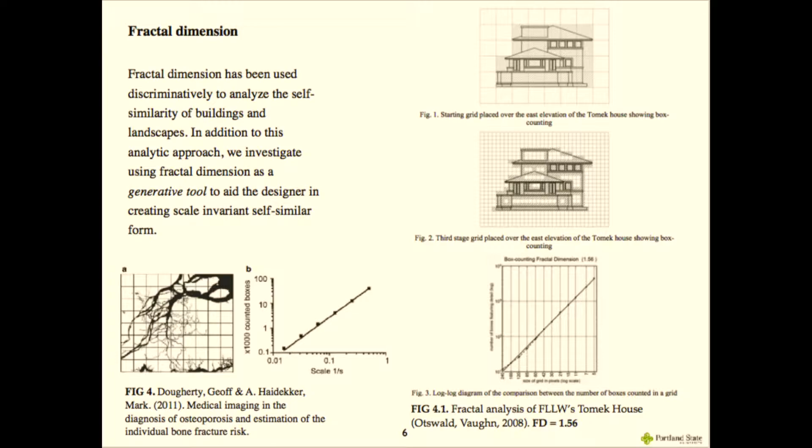Throughout history, we can see architects using fractals in their geometries. And there's also a strong connection to nature.

There's a lot of algorithmic design being investigated and explored in architecture, and some of this stuff is really, really fascinating to me. There's kind of like the emergent paradigm, which is that the whole is greater than the sum of the parts—superadditivity.

Then there's the fractal or holographic idea that the part contains the whole, which is more like this idea of DNA. Within the part is the seed for growth that is basically like an algorithm.

Algorithmic architecture is nothing new. We see that there's been a lot of exploration.

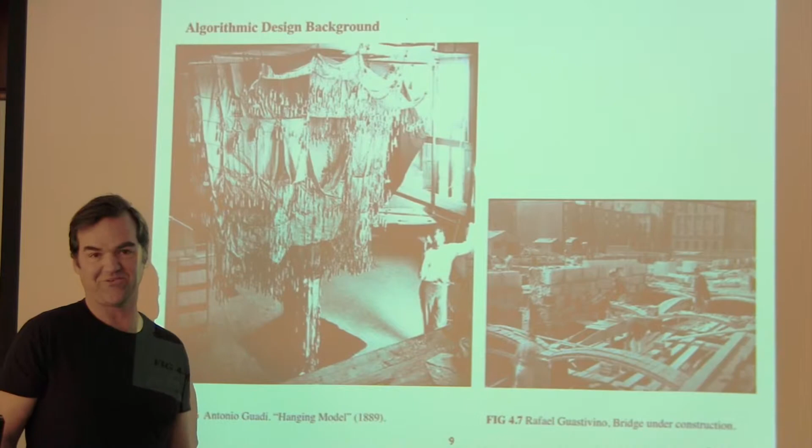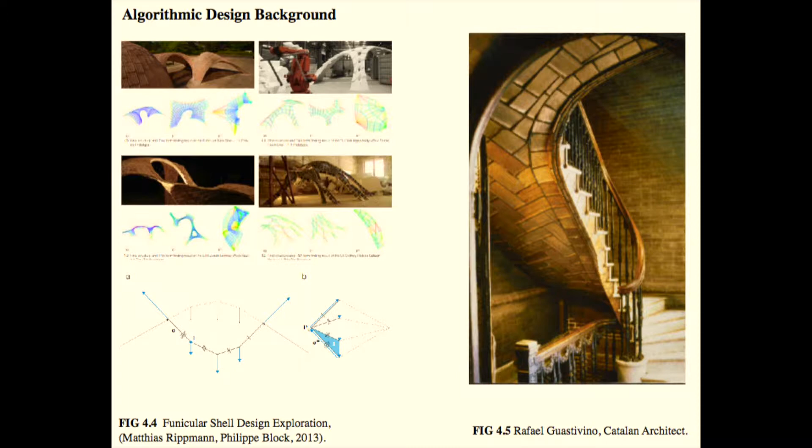Here's Antonio Gaudi's upside-down chain building, where he's studying forms that are in tension with catenary curves. He flips this upside down and it becomes a completely compressive form that he can use masonry elements to build.

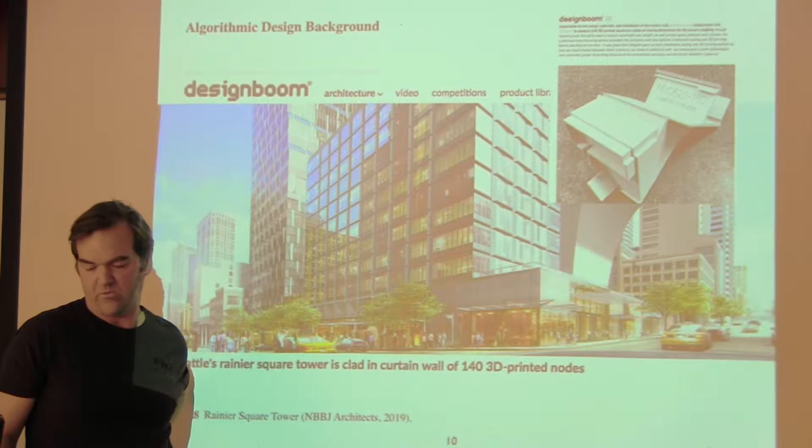And this was just a building going up in Seattle soon, where they're 3D printing elements of the facade.

Are people here familiar with Game of Life and CAs? How about Golly? Has anyone played with Golly? Golly is a tool you can download as open source, where you can basically program with CAs.

Wolfram has shown us that Rule 110 for an elementary CA is capable of universal computing. So anything you can do on a computer, you can do with an elementary CA like this.

So the question I guess I'm asking you hypothetically is: is nature using a CA in its algorithm for how it defines growth patterns?

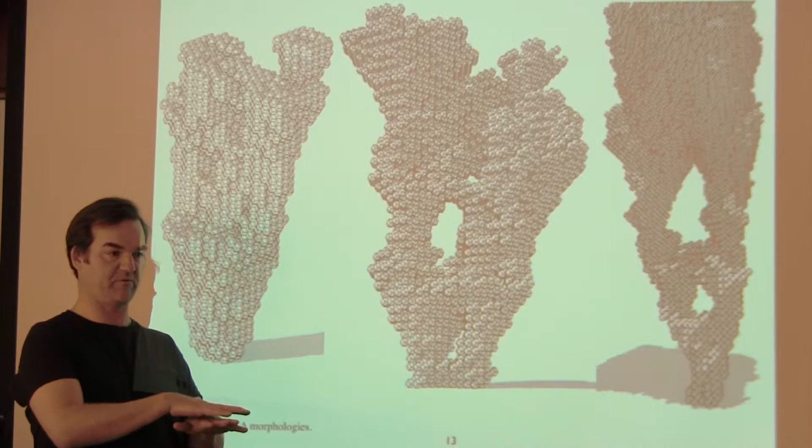I explored that earlier with Game of Life kind of strategies, where each successive iteration was laid on top of the iteration before it, so it creates this three-dimensional object. It's a two-dimensional plane of cells, but it's kind of additive, so you create these objects.

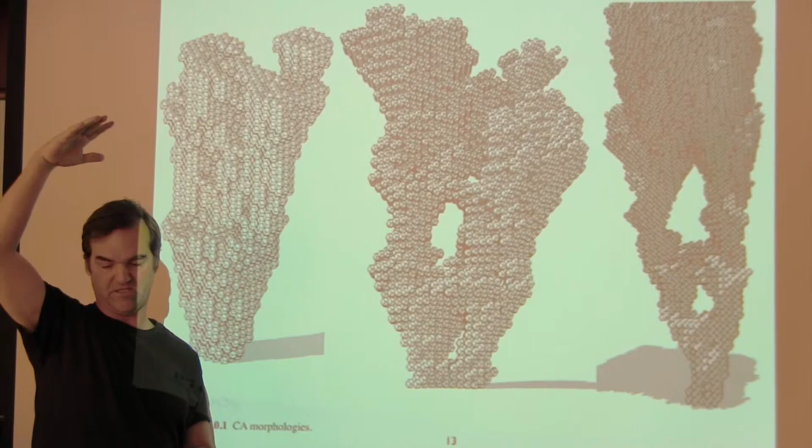And they have obvious fractal qualities. You can see this kind of bifurcating branching structure starts to happen. And they're all based on these very simple rules.

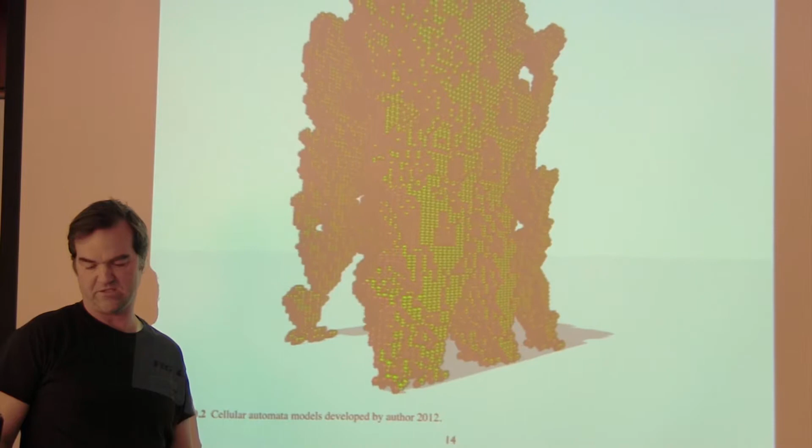Some of them are all interesting, but some of them are mind-boggling—they have these... this one in particular has a strong axis, and they don't cross over.

So it's like kind of geometry for free. You have a simple rule set, and you can create these really complex objects without having to actually define them like with a blueprint. Instead of having this complex representation system, you can just represent this object with a simple line of code, and then create a rich kind of tapestry of form.

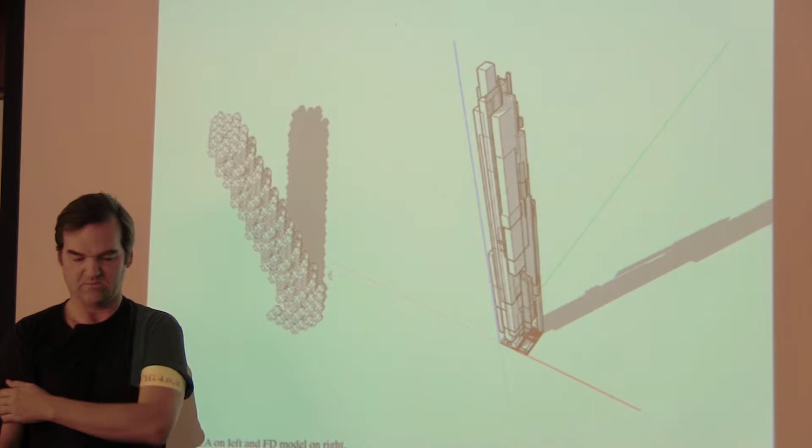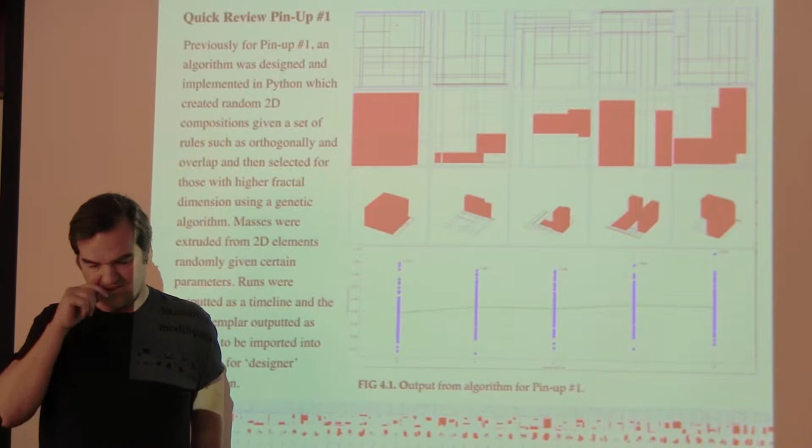Now I'm moving from that into this model that I'll present today, which is using this fractal dimension and a method I'm calling the Wollendorf method, after my late professor.

This is like a composition 101 problem or exercise, where you have a sheet of paper and you're asked to put down a number of lines that are orthogonal. This is used to teach basic principles of composition, like focal point and secondary focal point, rectilinear motion, terminus, symmetry, asymmetry.

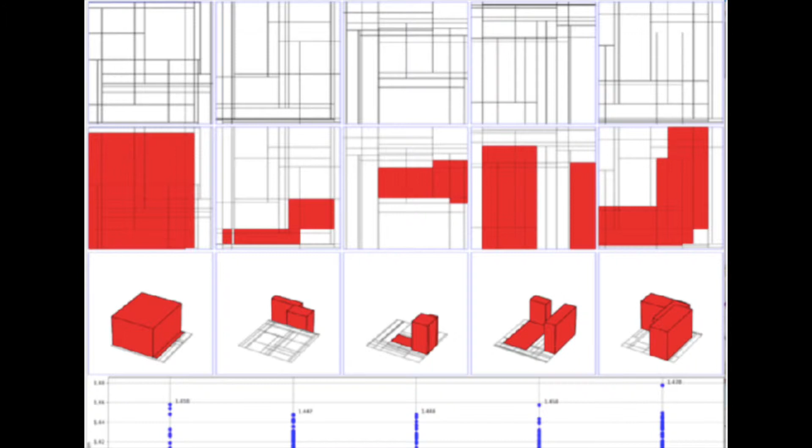All the gamut of compositional elements are embedded in this little exercise, and then you choose some of these to be masses, and the masses are extruded into the third dimension.

So when I interpreted this in code, I basically used random configurations to start with, but then we're selecting for higher fractal dimension, or a target fractal dimension, which creates the multi-level complexity and potentially more interesting compositions.

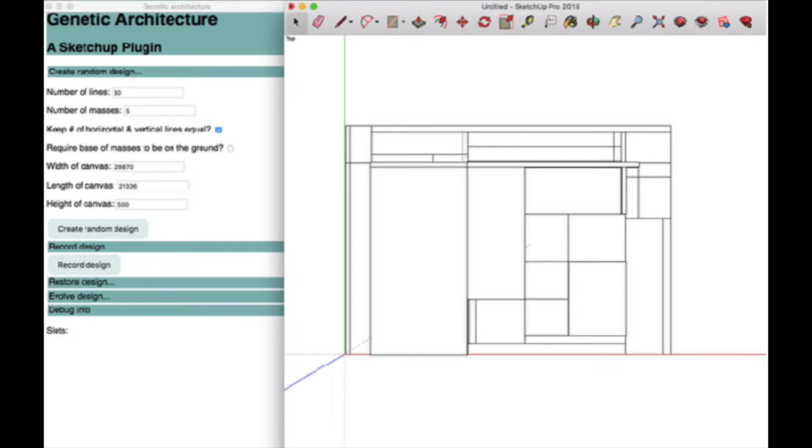So then I have a team of architects that I'm sending these designs to, and they're reacting to it. I've taken this tool now and designed it as a plugin for SketchUp, which anyone can use.

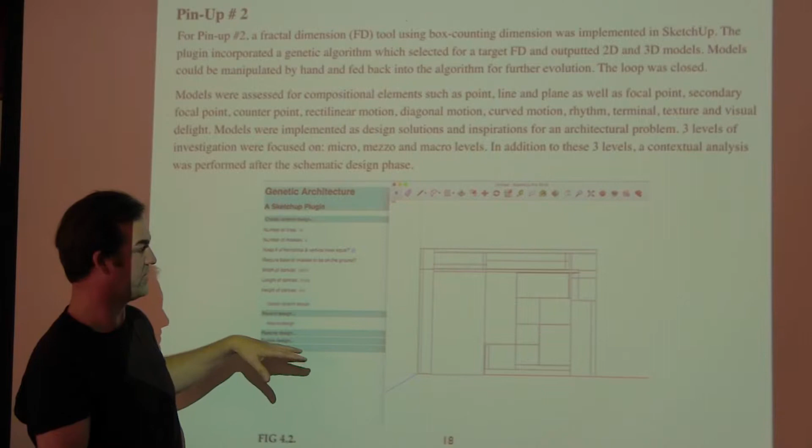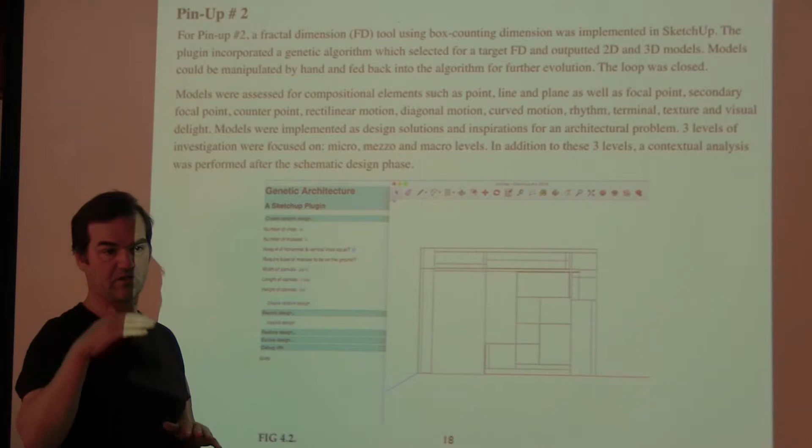You can create an object with certain parametric inputs relative to a building problem, and then those parameters can be defined. As the architect, you can under the hood reprogram the tool to have additional parameters that could be useful for that particular design problem.

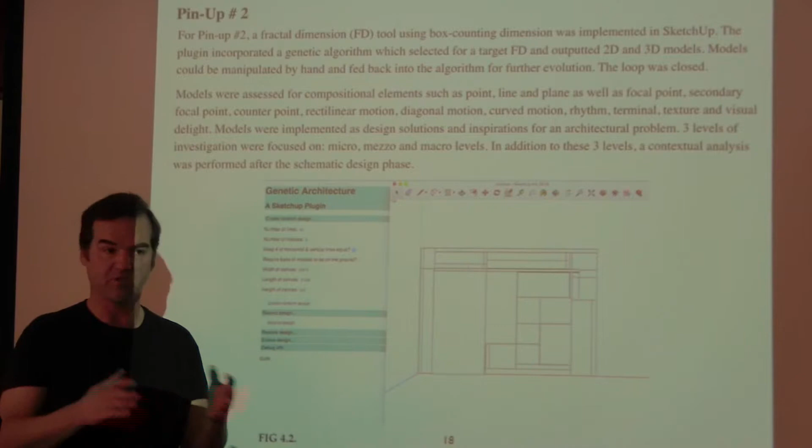So instead of just using CAD or BIM out of the box, here now we're able to redefine the CAD system so it can compensate for the unique qualities of that particular design problem we want to solve.

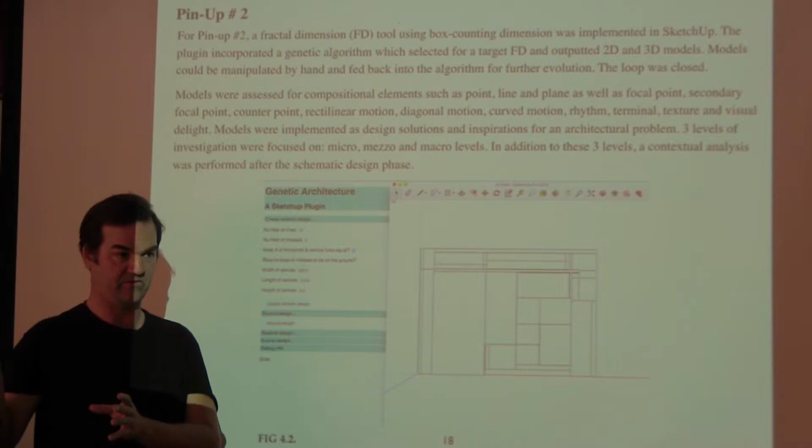The project I have is one that I competed for professionally with a team of architects, and we didn't win.

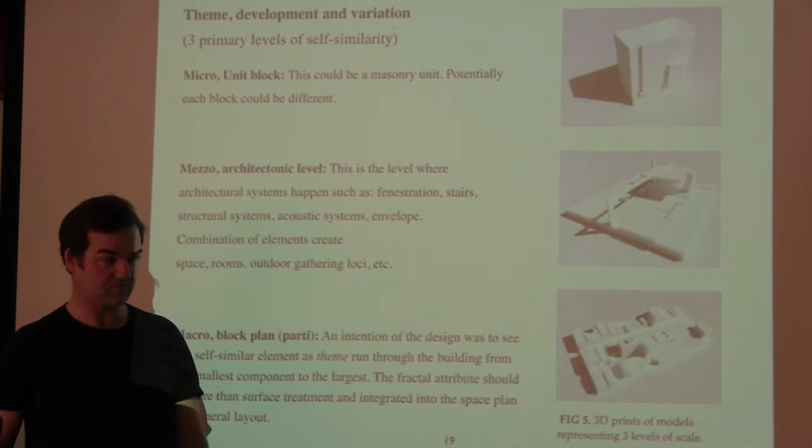I learned a lot about this project, so I'm using it as my case study. It's a mixed-use project in downtown Ithaca for affordable housing, ground-level retail, and a new bus station, which is desperately needed. There are some models on the table you can pass around that are 3D prints of this.

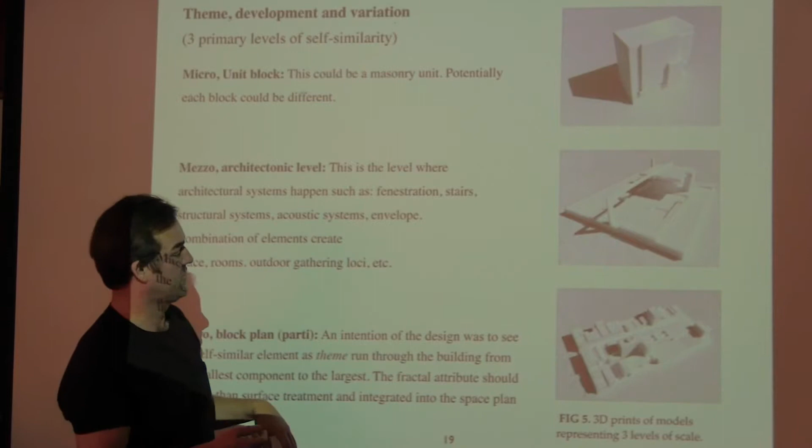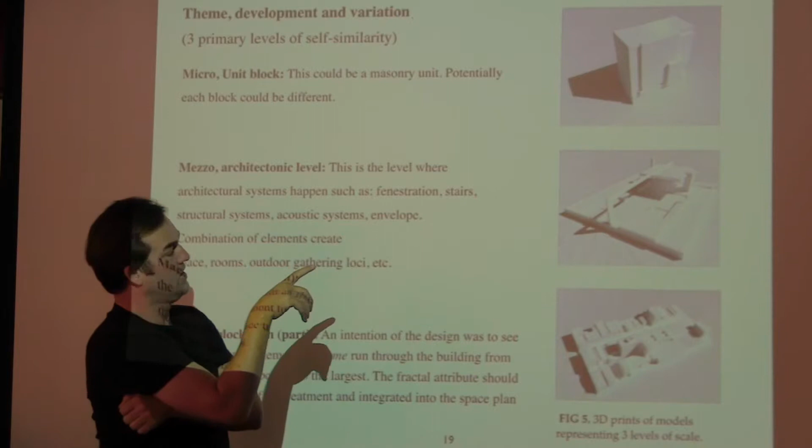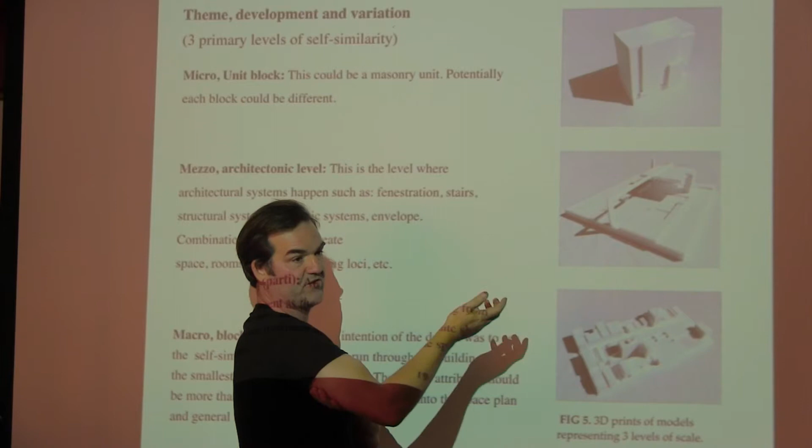I'm looking at the design from three levels of scale. The top is the level of the masonry unit, the block. Then this is the architectonic, human scale, where you could actually occupy or use it—it has function, like a staircase or fenestration elements. This is an outdoor pavilion for music or outdoor events.

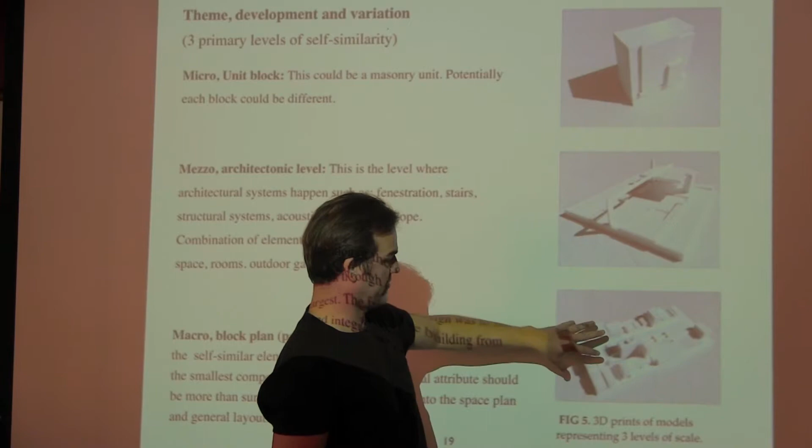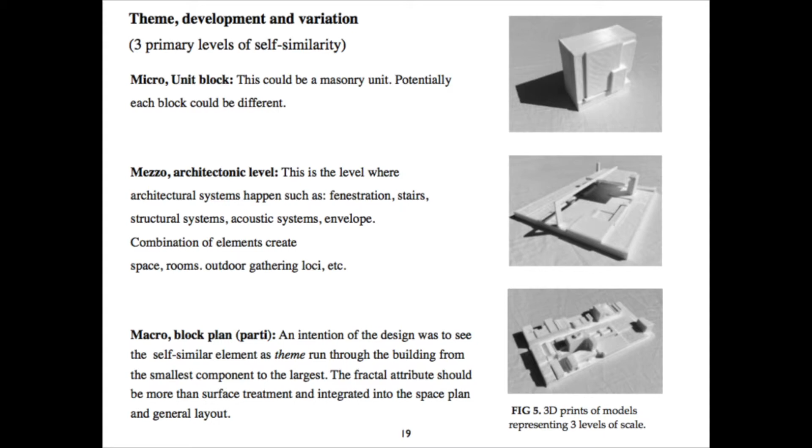Then you have the macro scale, which is the scale of the city block or the parti. It's hard to see, but you may see it in the model. This block, the composition of this block, is reflected in the facade of the building, so this becomes the parti for the building overall. So the design of the block—these slides are at the micro level.

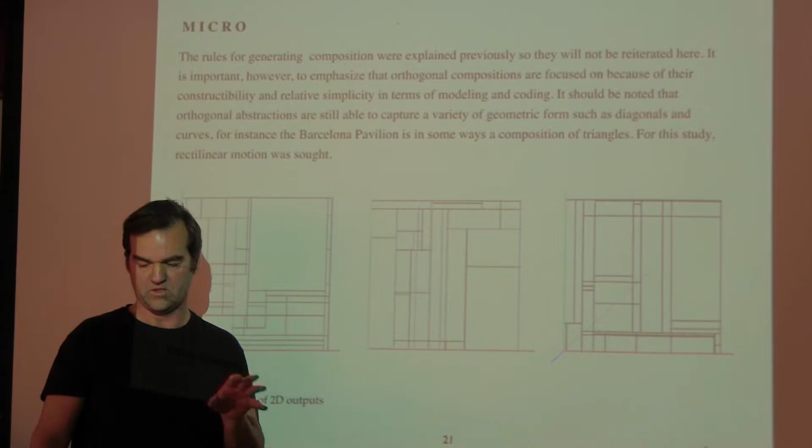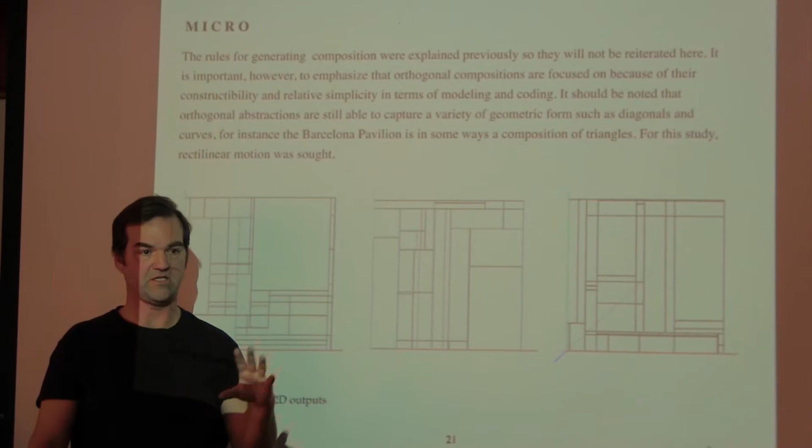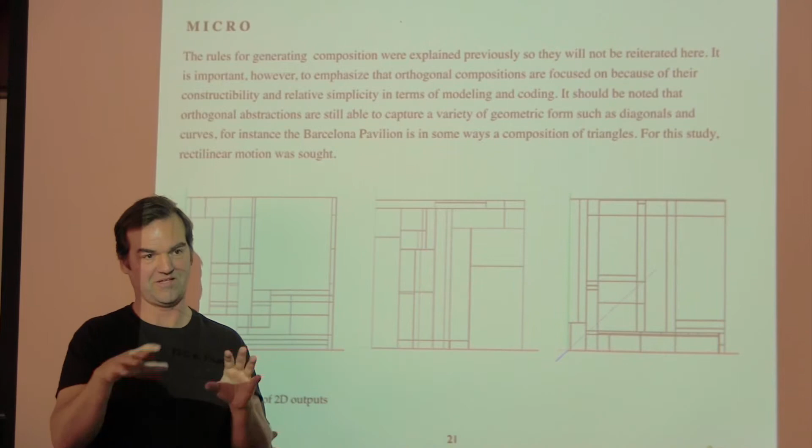So we look at integrating—the way the plugin works is the computer will come up with different designs with a fractal dimension, and then you can choose some of them to be seeds in the genetic algorithm, and it will spit out the next generation of designs. So there's a level where the human is the matchmaker, choosing which components to use to procreate for the next generation. That's a level of design happening, which is interesting.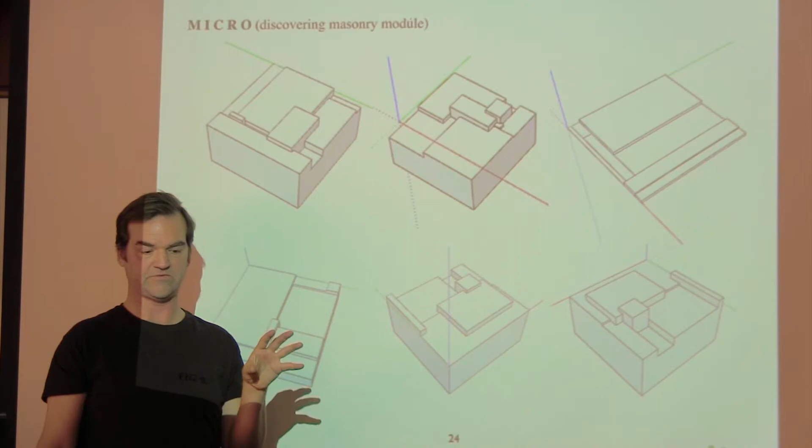It's a recursive process happening at a small scale, and you can extrapolate that. So the design process itself could be a fractal process where you have this recursion happening at a small scale, and then also happening at larger and larger scales.

Here the block is being used to create panels. And now I'm taking this meso-level look at breaking up the facade to have a mid-level of detail. It's a tripartite approach.

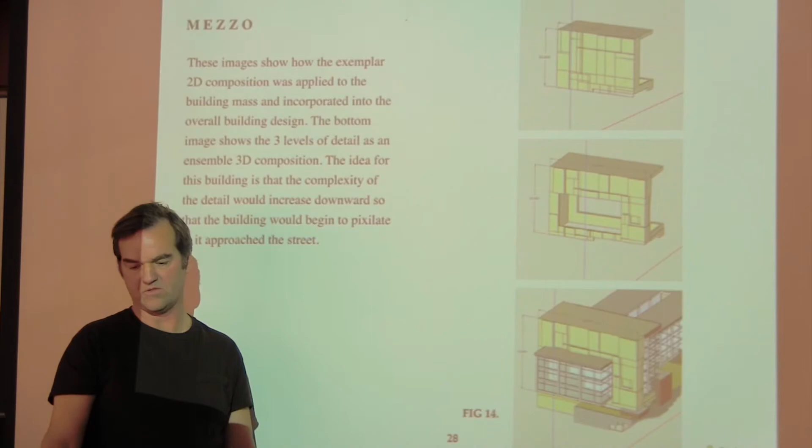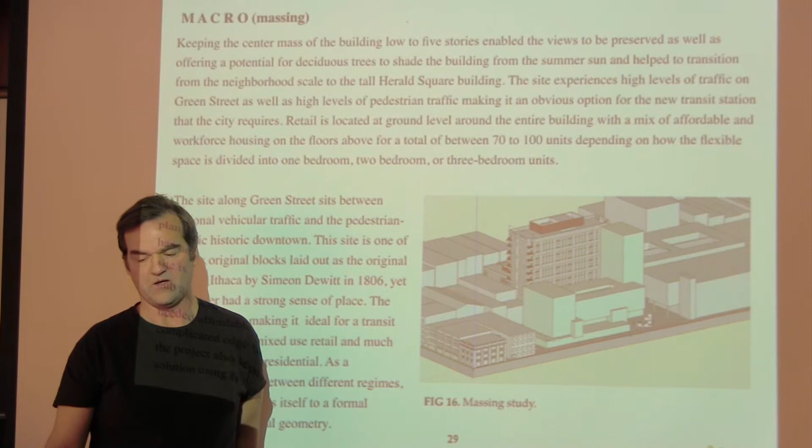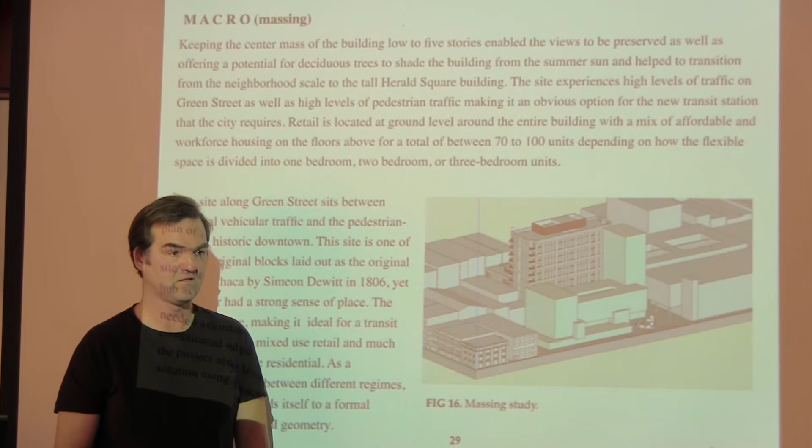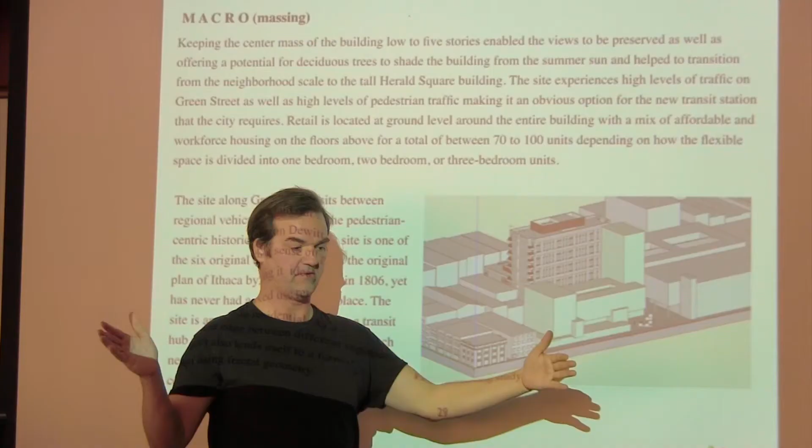The massing study for the macro level is basically the block, with me now pushing and pulling different elements. But I thought about this problem and talked to the stakeholders for this project for 4 months before I designed anything. The owner of this building was backing our proposal, and they really wanted to preserve their views—all the other proposals the city had were maximizing the boundaries and height limitations of the site, blocking the views for this building.

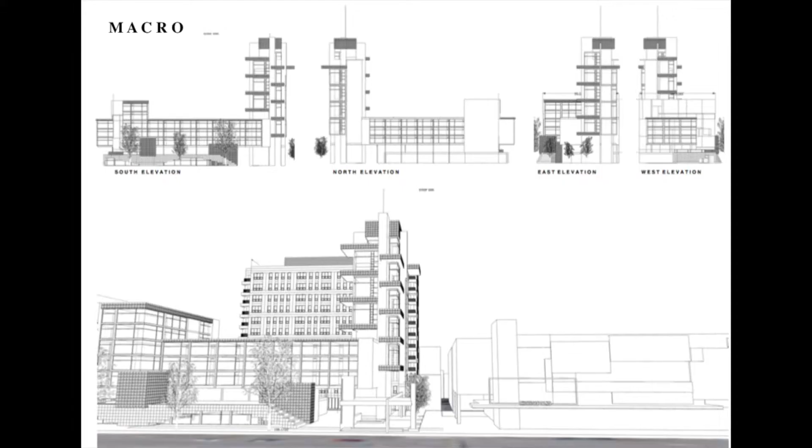So I pulled these masses apart and put the masses on either side so they could retain their views, and kept the center mass to 5 stories, which could also be shaded with deciduous trees for solar reasons.

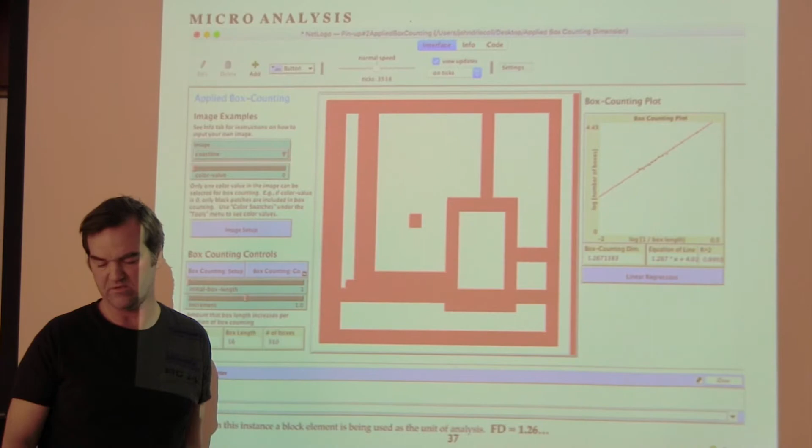After the schematic phase is finished, I'm doing this post-analysis of the different elements at the micro, meso, and macro levels. What I found was that typically the fractal dimension increases as you zoom out. So the macro building has a higher value, 1.589, than the micro level, which is 1.26. I think this is often true.

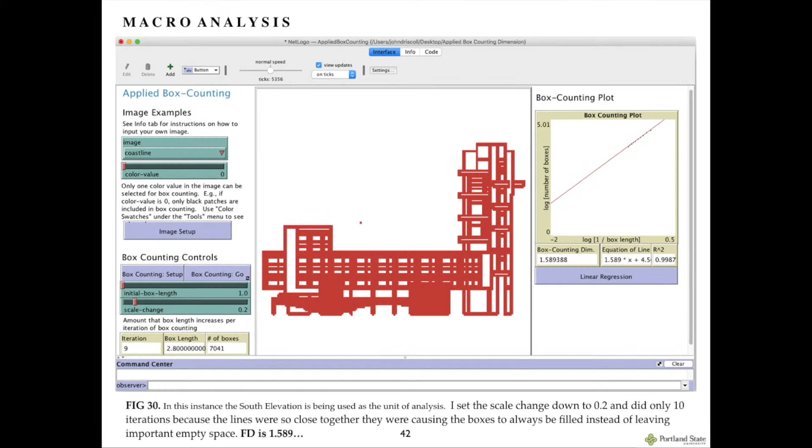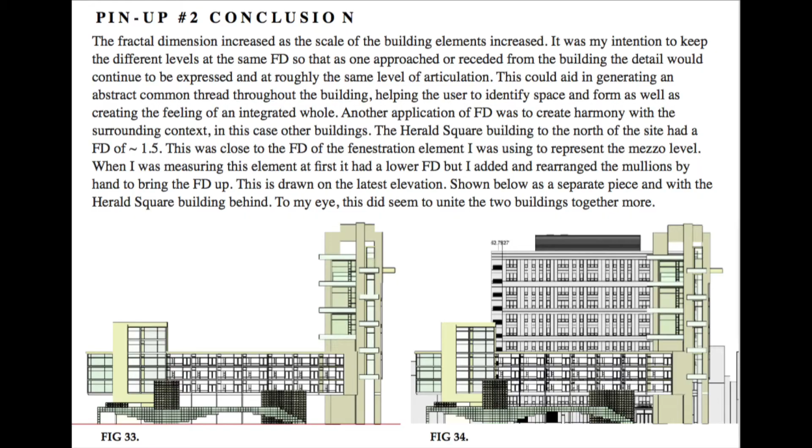I studied the fractal cartography of Portland and found that if you zoom in, the fractal dimension tends to get smaller, and as you zoom out, it tends to get larger, which intuitively makes sense—things are more complicated at the larger scale. But the idea here is that it doesn't have to be that way; you could have complexity happening at every level, giving a sense of identity to the building, where you see a consistent level of detail instead of, say, international style.

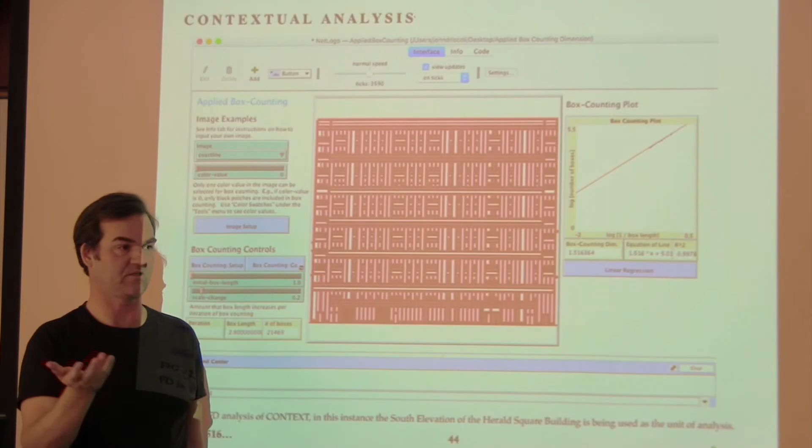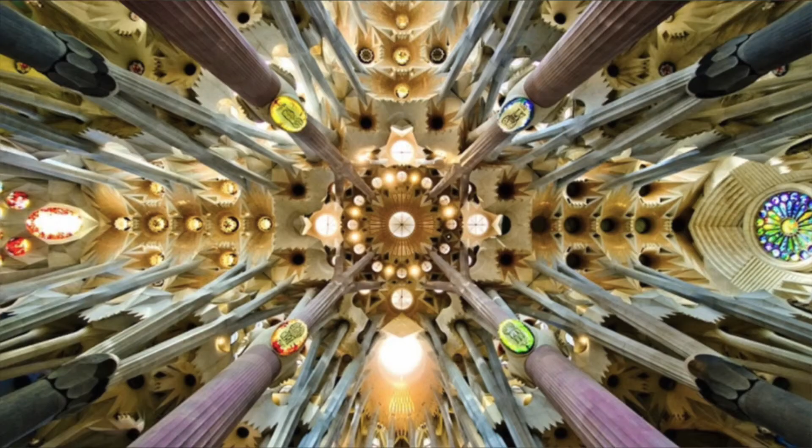In international style, you get to a certain scale and suddenly it becomes blank—there's nothing left, just one solid object without that cascading level of detail, like we see in Frank Lloyd Wright's buildings and Antonio Gaudi's buildings, and in nature, where at every scale you choose to look at, there are interesting things happening.

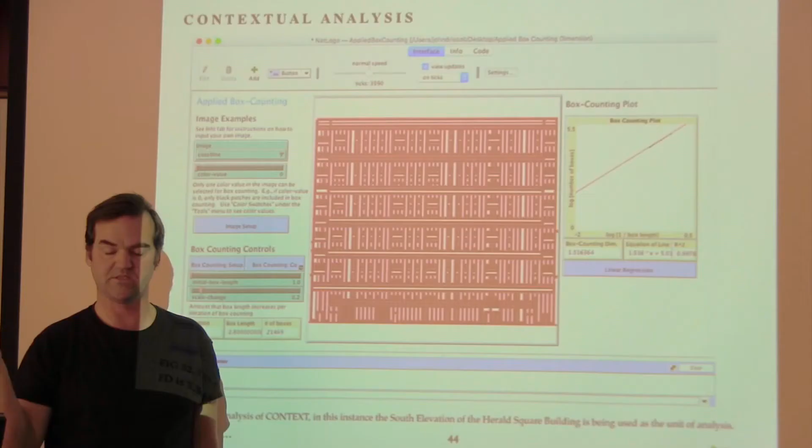This was looking at the building behind my building, and its dimension is 1.516. So there's a contextual link—you could look at the architectural context of the site as well as the landscape of the site, and make a relationship between the multi-level complexity of the building with the multi-level complexity of the surroundings.

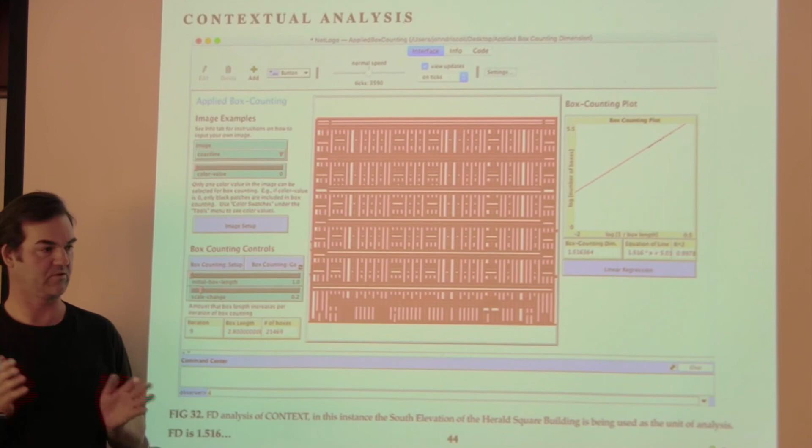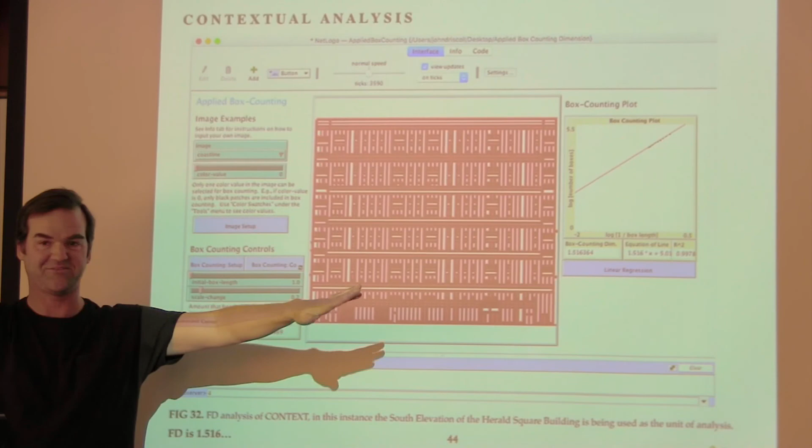So I think that's it.